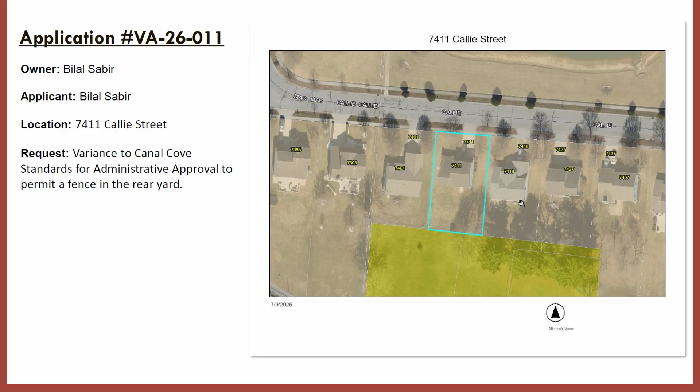The first item on tonight's agenda is VA 26011. The address of the subject property is 7411 Callie Street. The request this evening is a variance from the Canal Cove standards for administrative approval to permit a fence to be located within the rear yard. The applicant is requesting a fence in the location outlined with the red box within the rear yard of the parcel.

The development for Canal Cove, when it was basically created by Dominion Homes at its original conception, had a list of deed restrictions and other HOA restrictions that were also part of a document to be enforced by the City of Canal Winchester in a joint effort. As part of that list, fences are prohibited within the rear yards of this development. Otherwise, if you have a swimming pool where zoning code requires a fence, that fence would be a maximum of 48 inches in height.

So that happened back in 1995, continued through 2003, again with Dominion Homes. And then in 2015, when Westport Homes came through and developed the rest of the subdivision out, they reaffirmed those conditions for administrative approval. I have all 3 of those timelines located for you in the staff report.

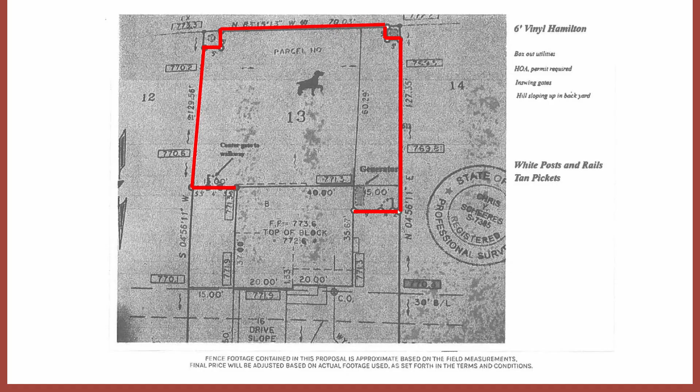When looking at the applicant's submittal here, they have requested relief from this standard due to a support letter from their VA physician stating that due to various medical conditions and PTSD which the applicant suffers, it requires the installation of a fence to secure the full enjoyment of his home and his property. This document was served under the Fair Housing Act and Americans with Disabilities Act, which both require reasonable efforts on behalf of the city. The applicant here put together this letter going over their request for the fence, as well as a copy of the VA prescription for the fence.

When looking at the criteria for approval itself, for special circumstances and conditions, the applicant has provided a medical recommendation that specifies his needs for his treatment. For a literal interpretation of the zoning code, the applicant would be deprived of his rights to use and enjoy his property based on his medical condition and his doctor's recommendation. Special conditions and circumstances, in this case, result from medical diagnosis and recommendation from a VA physician.

Granting this variance grants a privilege, but not an undue privilege because of the medical diagnosis. Staff recommends that for this fence to not adversely affect public health, safety, convenience, comfort, prosperity, and general welfare, the fence approval shall expire upon transfer of the property from the current owner/applicant and be removed from the premises upon transfer.

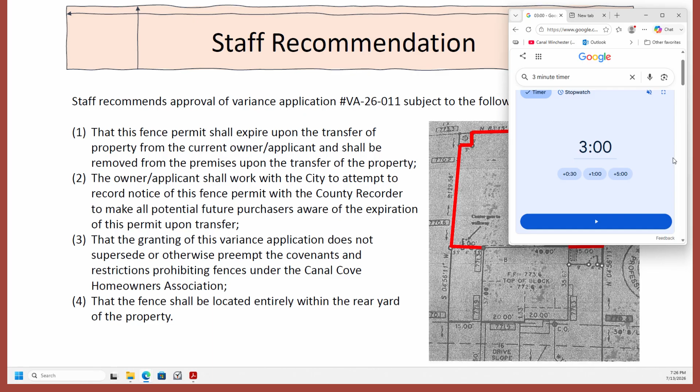No, I mean, I take those points. I certainly understand them if I was in the neighborhood or on the HOA. From our perspective, we have to at least make a reasonable effort to accommodate a federally mandated accommodation. And we think, with the conditions here — I also take the point on opening a Pandora's box.

My only counter to that would be — and you never know — but he does have a VA-approved letter with a recommendation of what he needs for his treatment and his care. So we tried to style the conditions such that this fence goes away when Mr. Sabir no longer lives in the home. That's actually not your condition that's on here, though.

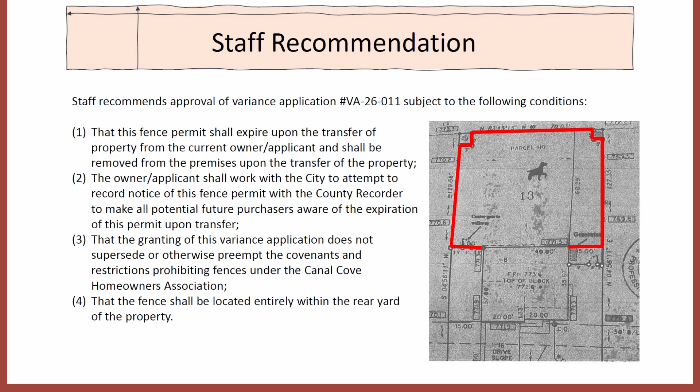The next application on tonight's agenda is variance application VA 26-012. The address of the property is 9270 Bowen Road. The applicant is requesting approval for a sign variance, chapter 1189.07A5, to allow a wall sign to be mounted less than 8 feet from grade. The subject property is recently developed, occupied by Oxford Automotive, an automotive repair facility, and the former Reichert Vanland site at the corner of US 33 and Bowen Road.

This property was recently rezoned to limited manufacturing based off an adjacent tenant on the same parcel, working with the owner earlier this year. The applicant is requesting approval to install some wall signs on the front of the building.

There are 2 variances for tonight's discussion. The first is for a wall sign that is less than 8 feet from grade, which is a requirement from chapter 1189.07A5 of the zoning code, stating no part of any wall sign shall be less than 8 feet above the sidewalk or ground level.

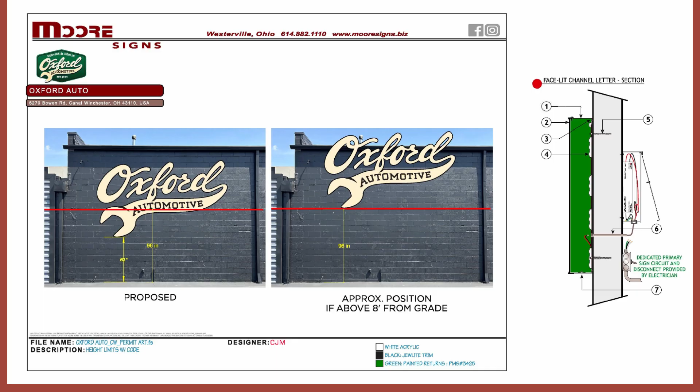The overhead displayed earlier shows previous parking from the RV dealership that used to be there. I don't believe that parking will be in use either. All pedestrian traffic for this location will be entering through the front of the building, which is to the northwest, and no pedestrian traffic would have the need to go beyond the sign for any reason, as the rear of the property is devoted just to the mechanics that work there.

In regards to the design of the sign, the wrench and automotive portion, as you can see, is nearly 50% of the overall graphic. This is branding that is consistent with the other locations across the city, Central Ohio, and it is important to add context to the word Oxford by utilizing the word automotive, and the wrench is very much important to add context to their building.

We'll get into this in the other variants as well, but one of the important aspects specific to this location we found is the adjacent property to the southeast is being utilized by a utility truck, bucket truck company, and the concern of the owner is that this may not come across as an everyday car mechanic, rather it might look like a utility truck mechanic, and they want to make sure they're very adamant about maintaining their brand for this particular sign and for the other variants as well.

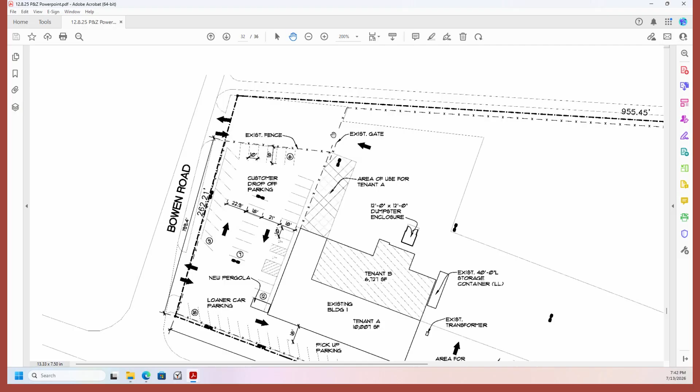This is the area in question for the sign placement to be below 8 feet in height from the base. And then again, the site plan, this is how the parking lot was restriped for the business. There is an 18-foot drive aisle, a one-way drive aisle between the building. The chain link fence is actually back this way a little further, with angled parking along that entire chain link fence side. So that's what created some of the concerns for the height and the placement.

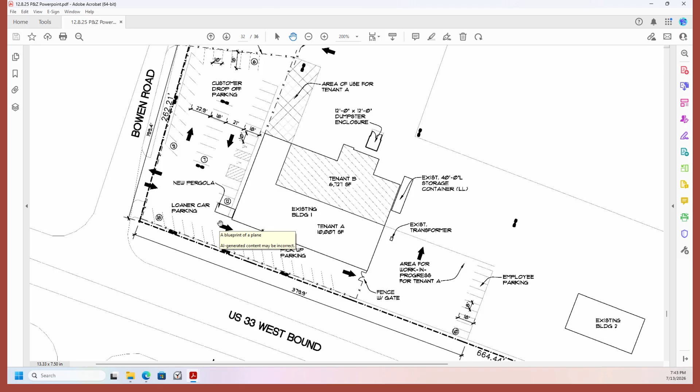And this is a technicality, if you don't know that's okay, but what percentage of the sign is below the grade as proposed? I think the other Mr. Moore could probably answer that better, but it appears to be from my end about a third. The very bottom of that wrench is roughly, is that 62 inches off? 5 feet. That's what that is, okay, I can't read it.

Any other questions for the applicant? Yeah, so assuming that is 100% scale, if you dropped it to 90% scale or 80% scale, wouldn't it fit? We tried reducing the size to get it fully above the 8 feet, and when you view it from the perspective of Route 33, it becomes ineffective, and more so it becomes a hazard because people are trying to read something they can't read as they're driving down 33.

I'm in the business of signs. Bigger is always going to be better, but there is real reason for having larger and easier to read signage when it comes to highways such as Route 33.

I guess to ask the next question, the graphic here shows it's dropped down a bit. If you were to push it clear up to its maximum height, what's the leftover size? It's about 6 inches. So if we put the top of the D, which seems to be the highest point of that logo, and butted it up against the gutter, we may get to where only the bottom part of the wrench would be below that line.

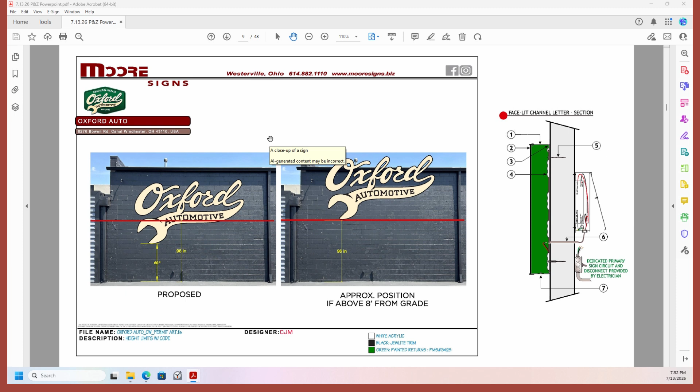Do we have a motion? Mr. Chair, I'd like to make a motion that we approve VA-26-012, with no additional conditions. I'll second that.

All right, so motion made by Mr. Deeds, second by the chair. Any further discussion on this one? All right, roll call. Mr. Donahue? No. Ms. Gooden? No. Mr. Deeds? No. Mr. Cosgrove? No. All right, so VA 26012 is not approved.

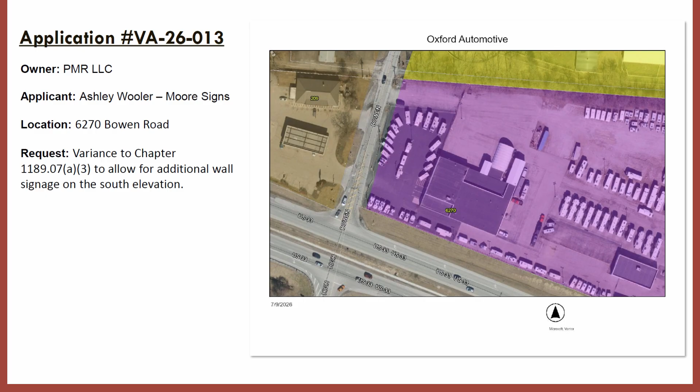The next application, VA 26013, same address, 6270 Bowen Road. This variance request is from Chapter 1189.07A3 to allow for additional wall signage on the south elevation. The applicant has proposed two signage locations on the south elevation. The two signs are shown on the graphic on the screen. On the left-hand side, the applicant is proposing a sign at 47.5 square feet that states 'We Fix Cars.'

I think the applicant explained it clearly in the last application. They want to differentiate themselves from their neighbor on this adjoining parcel, that they are not working on their equipment; they're doing their own differentiating services. On the right-hand side, as discussed in the last application, they want to have a second sign that is a branding identification for the name of the business.

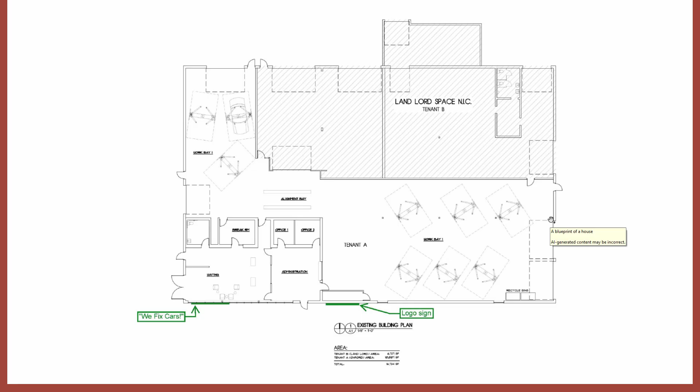The applicant has noted in their application that this elevation is approximately 160 linear feet. The zoning code would permit signage on that elevation of 160 square feet. The applicant is requesting an additional 22 square feet beyond that. Again, from staff's review, the makeup of that additional 22 square feet doesn't make an impact for it being a name of the business, or what services are offered. However, this is how the applicant has presented the information this evening.

When looking at the criteria for variance approval, staff notes that there are special circumstances and conditions not applicable to all lands or structures in the same zoning district. The applicant has provided information showing that the sign configuration is appropriate for the building scale, the US 33 traffic, the parking located in front of it, the fencing, and other elements that make this additional signage warranted. When looking at the literal interpretation of the zoning code, it would not deprive applicants of rights commonly enjoyed by other properties. Again, this parcel is unique—it was recently rezoned to limited manufacturing, and has a commercial auto repair business as the primary user on the property.

The user on the back end of the building is kind of secondary to this use. They don't have any actual on-site employment. They have vehicles coming and going, but no commercial traffic like this primary tenant has. Also speaking to New River Electric in the back, they don't want any signage, they don't have any need for signage. While that may change with any future tenant space for that rear part of the property, it does make an impact for tonight's discussion.

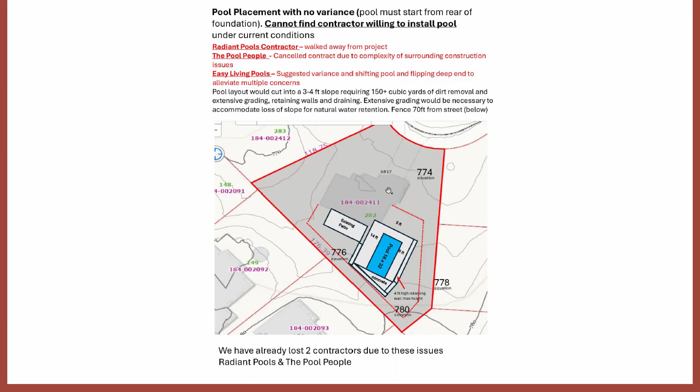Looking at this graphic here, comparing what was code compliant to what the pool company has provided as a solution - less than 50% of the pool is actually located beyond this line, in this side yard area of the property. Looking at a literal interpretation of the zoning code, it would require the applicant to reduce the size of the pool nearly in half to meet setback requirements, while considering what the minimum size of a pool should be to enjoy your property, or looking at other conditions.

This lot is also very irregularly shaped. It's in a cul-de-sac that is also a very short cul-de-sac. Looking at some of these conditions in total, this graphic here shows it really well.

None of their neighbors to the left of the house, if you're facing it, are on Murdock Court - they all have Murdock Lane addresses. So both neighbors immediately to the left of the house, all three neighbors, have rear yards only that face this parcel. Unlike, say, this neighbor here, which would have two neighbors that have side yards facing their yard.

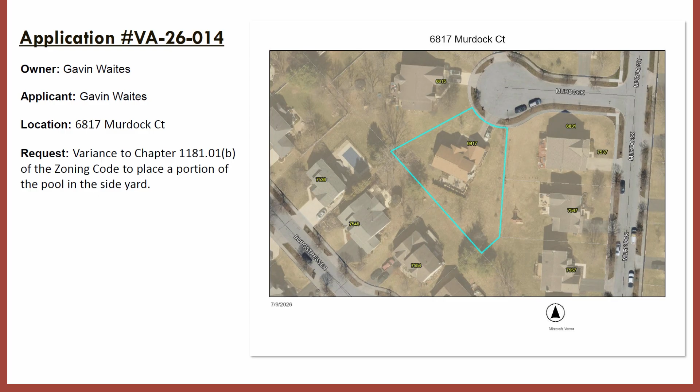So from a context perspective, if this wasn't a cul-de-sac and there was another parallel street here, you'd have two backyards facing each other, so it's not as much direct conflict with an adjacent neighbor as it would be if it was one lot away. That laid into staff's consideration for the recommendation.

When looking at these special conditions and circumstances, again, they do not result from the actions of the applicant. Site grades in this section of Ashbrook Village generally follow natural topography. This is a very unique subdivision with a lot of grade change throughout it - something I think a lot of the neighbors in that community pride and enjoy. So modifying the existing grade on a lot-by-lot basis becomes a little abnormal rather than working with the existing grades.

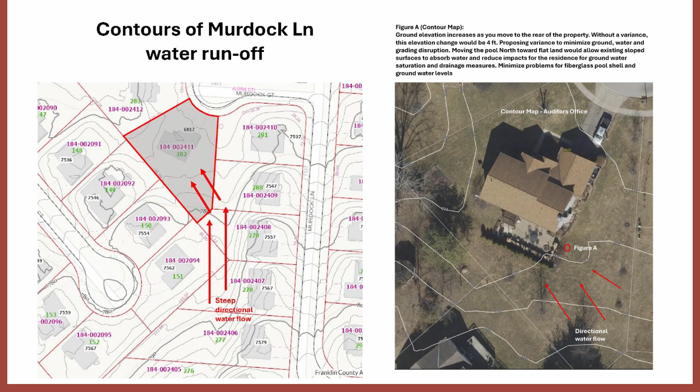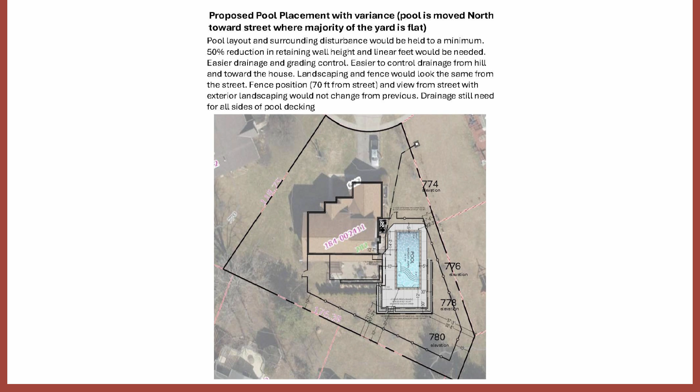The applicant has noted in their proposal that their installation still requires a small retaining wall around three sides of the pool. In talking with the applicant, I don't think I put it in my PowerPoint deck, but they have a graphic in their presentation showing they're proposing to screen the majority of this pool area with additional landscaping to help soften the impacts of its placement. I think the applicant was looking to do that regardless of where it went, so that's just part of the deck I didn't get up on the screen for you.

Staff is recommending that VA 26014 be approved with the condition that the applicant provides a copy of the HOA approval letter during the submittal of the pool permit process.

Some communities like Ashbrook and Villages of Westchester have items that are not administratively regulated but have HOA approval processes. Staff tries to work with those HOAs—in Ashbrook specifically, they have certain types of fencing that they allow and don't allow. We've found administratively over the years that a homeowner gets approval from staff, doesn't go to the HOA, and then the HOA is left trying to chase it. So we try to help Onyx Realty out on that aspect because they've been sharing information with us, which is helpful for our internal processes. It's kind of a mutual agreement for helping that neighborhood out.

Thank you. I know we've granted variances similar to this for lot size coverage, especially in Westchester, over the last 12 years I've been doing this. I don't know that we've ever seen one in the side yard, but for this particular property and layout, I think it's the most reasonable.

My question is, during the pool permitting process with the city, do we have somebody in the technical review or permitting process who will go out and ensure that the slope and grade of the natural drainage down that hillside is not impacted by the construction or placement of the pool? Meaning, in a large storm, there's not a natural impact based on this structure going there. Really good question.

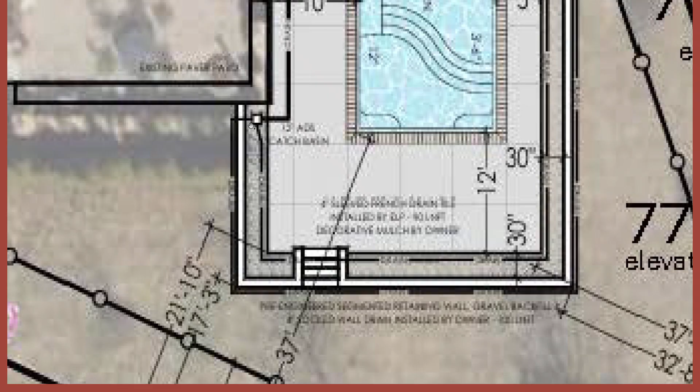Yeah, I think there's like two French drains. I don't have the zoomed in version of this, but they're showing a retaining wall—this bold outline, kind of white line. And I believe all of this in here, based on how they had the hatching done, was to be some kind of graveled area around the perimeter of the pool. This retaining wall itself, just for a frame of reference, if there was no pool, we would have no permit process for it if it met the RCO standards.

So from a stormwater perspective, let me go back here. This site flows from this direction to this direction here, based on grades. There is a stormwater catch basin along the rear of these lots—I believe this property has a catch basin maybe midpoint here and midpoint here to capture stormwater flow. So from an impact standpoint, just from the grades, I think it would impact this property owner and not off-site parcels.

Okay. I just think it's worth noting in the permitting process. That's all.

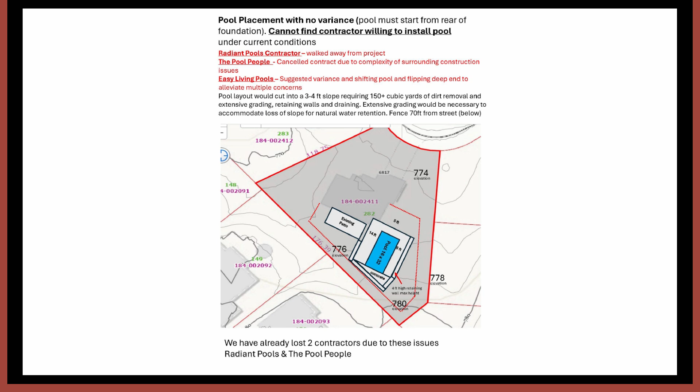The other question I had—are there any restrictions? I do appreciate that they're going to work with the HOA and put a fence around the pool and the property. I just can't remember in the residential code if we have a limit on the fence to, I think it's that front line—I always forget the technical term, the build-to line—from the street and the right of way, in terms of where a fence can be.

So from the city's code standpoint, to make it blanket and then piecemeal it: on the property, you can have a fence anywhere. Anywhere from the front of your house towards the street is limited to 3 feet in height and has to be a decorative picket or open style. Anything from basically this line of the garage here backwards can be a maximum of 6 feet tall.

In terms of the HOA approval process, I don't know if they have any differentiators for front yard versus side yard. Again, I don't look at that aspect of it. The only thing I know from the HOA process is they require a maximum of a 42-inch tall fence unless you have a pool, and then it's bumped up to 48 inches in height.

Up until 3 or 4 years ago, it was wood fences only, and I think the HOA has switched it to now allow vinyl fences. Finding a vinyl fence at 42 inches tall is next to impossible, so I don't know if that weighs into their decision to do that or not.

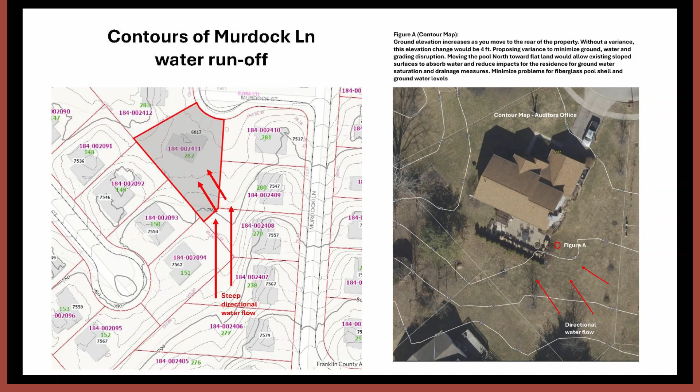So it complicates issues and risk with putting in a pool structurally. So with all these issues with contractors, we finally found one that said, if we're going to do this, this is our suggestion, which is the Easy Living Pools graphic. Essentially, they're wanting to shift it a little over 14 feet into the side yard.

To answer some of your other questions, the outline is a fence which is 8 to 10 feet off the property line, so that will be well off the property line. I don't have the graphic to show, but I'm putting in green giants and arborvitaes around the fence line, so in a few years it's going to be totally private. Even the front, I have beds. With the fence being the way it is, even with or without a variance, where the pool would be, it's going to look the same from the outside.

So the fence is a 4-foot vinyl. It's a Hanover style, so the vertical slats are close together. You're not going to be able to see through unless you're right up to the fence.

And then with all the growth that will be planted between the fence and the property line, they're not going to see that anyway. So from the street, just to give you some distance, it's 70 feet as planned from the fence to the street. And I do have approval from the HOA.

I've already sent the design. They are good with a 4-foot white vinyl fence. I sent them the style, and they're good with the design going around from the side yard, wrapping around to the back side of the house.

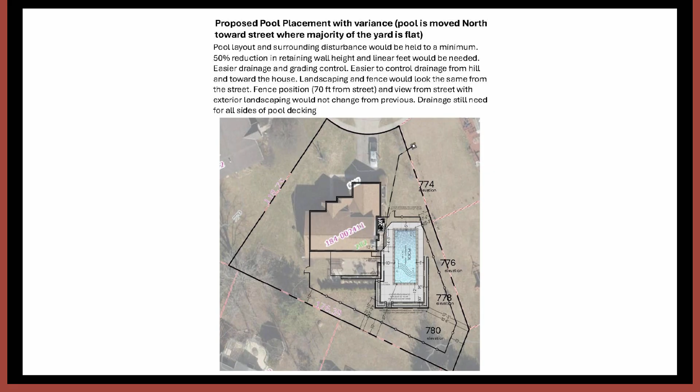All right, motion made by Ms. Gooden, second by Mr. Paulsgrove. Roll call. Mr. Donahue? Yes. Ms. Gooden? Yes. Mr. Deeds, yes, and Mr. Paulsgrove? Yes.

All right, Mr. Chair, I'll make a motion to approve variance VA-26-014. Second. All right, so...

So just as stated, they want to proceed with the HOA approval letter and the permitting process. Okay? Yes. All right, so that was made by Mr. Deeds, second by Mr. Paulsgrove.

Any further discussion? All right, roll call. Mr. Donahue? Yes. Ms. Gooden? Yes. Mr. Deeds, yes, and Mr. Paulsgrove? Yes. All right, so VA 26014 has been approved. Good luck.

The next application on tonight's agenda is VA 26015. The address of the subject property is 7188 Charleton Court. This request is a variance from chapter 80.27.04(7) of the 1990 zoning code to reduce rear yard setbacks.

Again, just as a reminder, frame of reference, Villages of Westchester was planned in the 90s. All the zoning code standards are related to the 90s. This section, the text has not changed from the 90s to today, but just referencing the appropriate title from the 90s was used in this application.

The applicant is requesting approval to install a covered rear porch in the rear yard over the existing concrete patio.

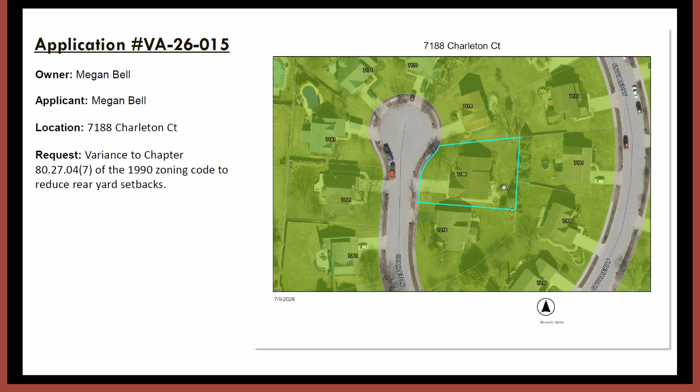So the rear yard setback in all of Westchester is 30 feet. Correct. Can you go back to where you have the measurements? I just need clarification—what does the 31.6 illustrate? So if you see this bump out on the rear of the house here, that is the distance from that line of the bump out to the property line. Looking now at an aerial here, that may be a bump out for a chimney maybe, or a bay window—it doesn't look really substantial for size. So are we saying right now that it already doesn't meet the rear yard setback because of that? No, it does. The house at the closest point is 31 and a half feet away. Okay, 30 feet is the minimum.

And what would it be with the proposed accessory or addition? The applicant's plans show that it'd be 24.3 feet away. My measurements, just based off of 37.4 minus 14, puts it at 23.4.

Any other questions for staff? If it's a different structure, a pergola, any of those types, does that require a variance as well? Or is it just a permanent structure?

So basically, if it's something that is attached to the principal dwelling, like an attached deck, I think our building official may even require any decks that close to be considered attached. If it was a pergola, or an open-ended pavilion that didn't have walls, because it's physically attached to this dwelling, it's part of the principal dwelling.

It would make it smaller, basically where this brick is - do you want to see a picture of it? Sure, I have a couple copies. That's right, it's on the next page. This is what it looks like currently, and this is what we want to do.

But where it is now, where the brick is, we're basically just coming out from the brick. I'm assuming the mulch beds and brick are probably already in the setback, because there's brick, then the prior owners added some type of stone and mulch. So we're basically just covering that area. If we made it smaller, it's going to look weird on the back of our house because it comes directly off the kitchen - it would look mismatched compared to the other side of the house.

Any other questions or comments for the applicant?

There's a note I should have mentioned - we did talk to all of our neighbors. Everybody's fine, but one of our neighbors wrote a note. He couldn't be here tonight, but he wrote a note, so I stuck that in there.

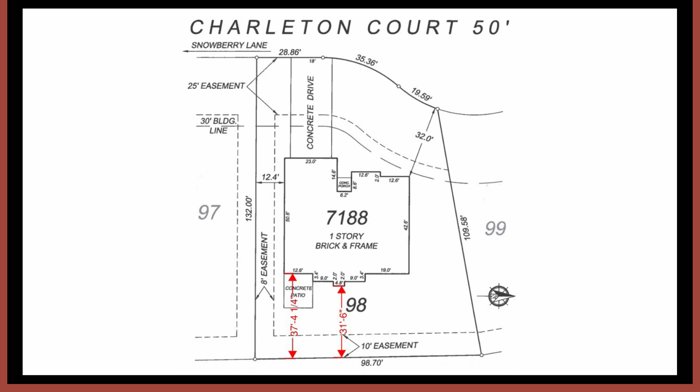So my comment would be, I think there's a couple things - it's a separate conversation from lot coverage on a pool or concrete patio or those types of things where it gets over 30%, and some of the things we've seen in the past. It's also a structure because it's connected to the current dwelling, and I think we're about 7 feet-ish over, thus the variance request.

Personally, I think it's a nice improvement to the property, and it's not encroaching on any easements or anything like that, but I do respect what the deed restrictions are and kind of what the setbacks are as well.

A lot of things in the city of Canal Winchester are complaint driven, so it's hard - staff can't go out and police if there are other setback encroachments within Westchester or anywhere else that might have these types of restrictions. And we did approve one after the fact within the last 3 or 4 years, but that's the only one we've approved in Westchester.

That was a situation where he did all the work and then asked for our approval later. And so I appreciate following the process and doing it the right way. That's just my opinion on it. I have no further comments.

But that was not a rear setback issue, was it? I believe it was - it encroached in the 30-foot? No. So that particular application I was discussing, they came before you because they were further exceeding lot coverage. Yes, that's what I thought. But part of the prior projects that took place over the past decade also encroached setbacks, though that wasn't the specifics of what was being discussed that evening. That was the only mention I could find of it in our database that goes back 25 years.

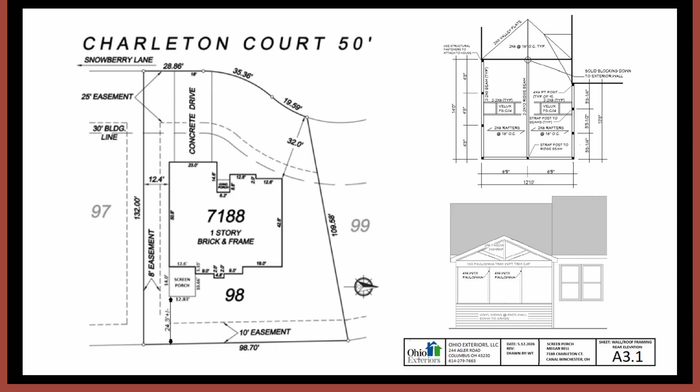The next application on tonight's agenda is conditional use 26002. The address of the property is 229 Winchester Cemetery Road. The request this evening is a conditional use approval from Chapter 1167.03 subsection G to permit a commercial kennel on the subject property for a cat rescue.

I'm going to try to pick up speed here. We've been here for an hour and 42, so Ellen, if I missed something, feel free to correct me. The address of the subject property is this parcel where 229 Winchester Cemetery Road is located. The request for the conditional use limits I've outlined in blue just for clarity, just to show that it's not the full property, full building. It's only a portion of the tenancy of the building itself.

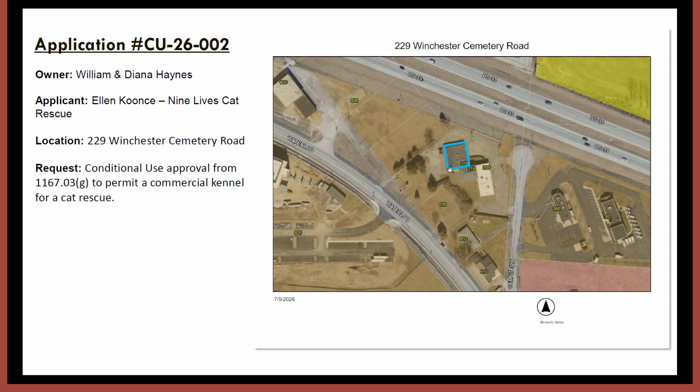It is formerly the Winchester Veterinary Clinic. They haven't operated in that facility since the 2019, 2020 timeframe, when they moved to Thrush Drive.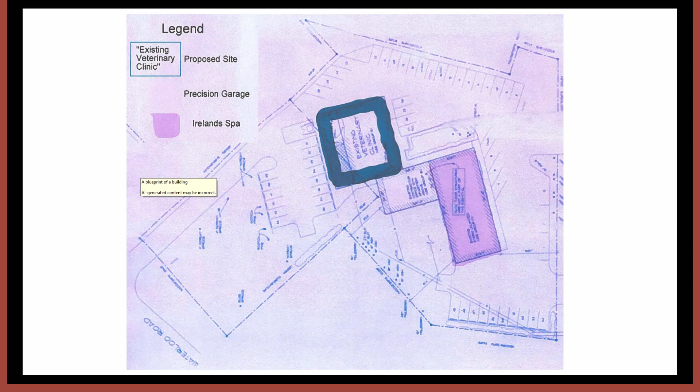The applicant, and this is where I'm going to try to be very brief, has plans on operating a boutique-style nonprofit thrift store that also has an indoor cat adoption and care area associated with the organization's rescue program. The applicant notes that the space will be clearly separated on the interior of the building for the 2 components. Based off the floor plan provided, I apologize it's kind of washed out on the screen, roughly 50% of the building is for the kenneling, the remainder is the retail component.

The retail component is the portion of this application we're not discussing tonight because it's a permitted use. It doesn't have any bearing on the conditional use. However, I've put as much information in my staff report to show the relationship between the two. So if you see there's a lot more in the applicant's submittal that's not in my staff report, that was done on purpose to focus your attention on the kenneling component tonight.

The applicant does list in their application the types of services offered and rooms associated for the cat rescue. They have a quarantine area, an intake area, internal temporary housing, separated litter areas, adoption area, and an office. The applicant's details show that a maximum of 12 cats will be housed in the free roaming adoption area, and within the intake quarantine zone, they will have capacity for an additional 25 cats.

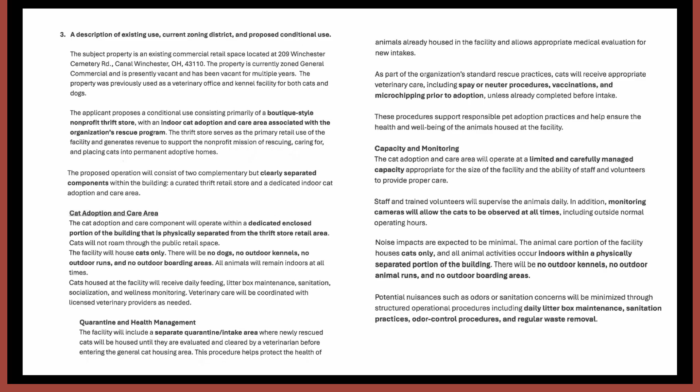The site used to be a veterinary clinic, having animals in the spaces in the building's past history. So promoting that type of service in the future is compatible in that nature. And the proposed interior occupancy of the building would not result in the destruction, loss, or damage of any natural, historic, or scenic features.

So staff is recommending that CU 26002 be approved as presented.

Questions for staff?

I guess I'm curious, why does this require a variance? So it's a conditional use request, not a variance for relief. A conditional use is a use in our zoning districts that is noted to require an additional level of review based off the contents of the application. Commercial kenneling is a conditional use in the general commercial zoning district, basically to review what type of kenneling, what the limits of it are, self-imposed limits from the applicant, location of the property, impacts to surrounding property owners, utilities, services, etc. So in this case, because they are kenneling cats as a business, and our code does not differentiate between temporary housing, like you're on vacation, or for sale or adoption animals, this was categorized under the kenneling component.

So this could be a question for the applicant, but I'll ask you first. Do we know how interdependent the conditional use, so the cat rescue and the thrifting business, are on each other? Is there a retail business no matter what, and then this is secondary, or are they presenting it together? That I think is a good question for the applicant, maybe to answer in terms of the relationship between the two. But from my understanding, one supports the other.

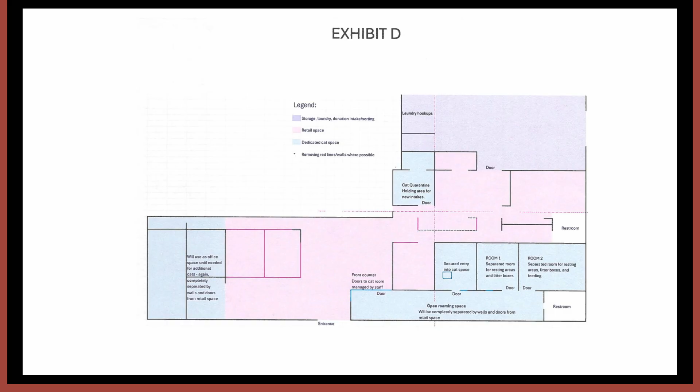All right, Mr. Chair, we'll continue on - let's make a motion to approve conditional use CU-26-002. Second. Motion made by Mr. Deeds, second by Ms. Gooden. Any further discussion? Roll call: Mr. Donahue? Yes. Ms. Gooden? Yes. Mr. Deeds? Yes. Mr. Paulsgrove? Yes. All right, so CU 26-002 is approved.

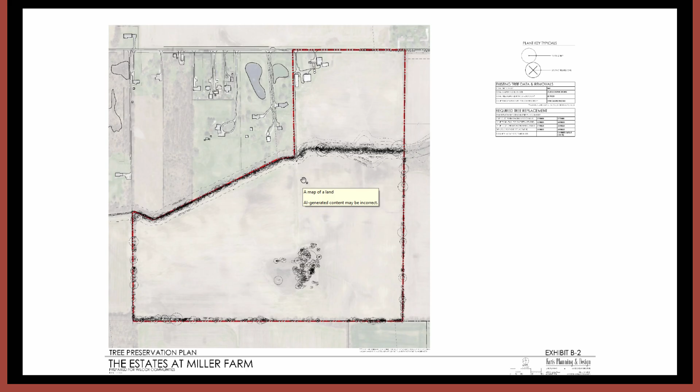When looking at the contents of the subject property, this is kind of the existing site condition. It shows there's some mature tree line fencing that's throughout the parcel. There is a wet area centered around the parcel, with some mature tree growth. But this really just serves as an existing condition graphic that shows, with the farmhouse, 99% of this property has been farmed for a long time.

When looking at the development plan itself, the applicant is proposing 271 lots. The site plan is broken down to connect to the development which has been approved to the east. This is the single-family development phase, this kind of L shape from the neighboring community that is going to be under construction. This road was designed to have a stub street to the north carrying through to this section of property, a stub street to the section south of the ditch carrying through to this parcel, and this property itself connects both north and south halves of Lisle Ditch together.

The property itself is proposing future stubs to the south to adjoining parcels. We require in our planning efforts to have stub streets connect to adjacent available ground when available, to promote good connectivity and good traffic patterns. I would say that historically we have not been so good about connecting on the other end of these connection stubs, but there's always the chance that this next project will make it. We have some stubs in Ashbrook Village that have yet to be connected to other parcels, other farm ground. We have some failed stub connections in Winchester that never made it, things of that nature. So best practice is always to provide them for future connectivity.

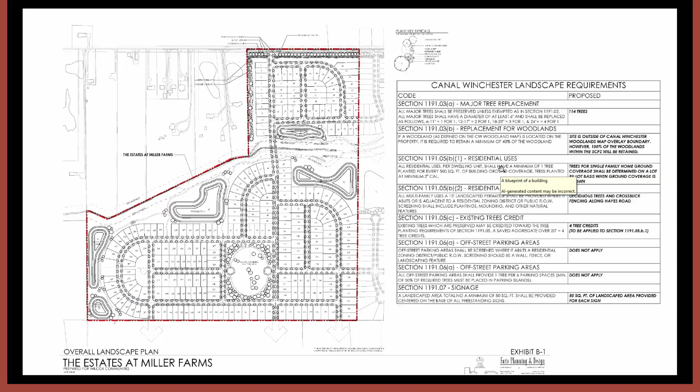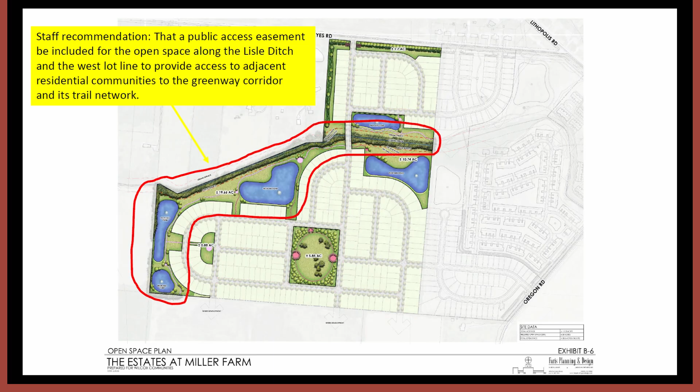The development pattern has examples for public amenities that will be provided throughout the site. Again, these are just examples, they'll be nailed down more during a final development plan, but there are commitments for fencing, public archways or gateways, pavilions, benches, and things to be utilized along the trail system, helping brand the neighborhood similar to the phases for the project to the east.

As part of that, the applicant is proposing to continue the hedge setback from Hayes Road to help buffer this property from adjoining residents, with mounding, landscaping, and a decorative crossbuck fence in black that will match the other approved phases, shown as this line in red at the top of the screen.

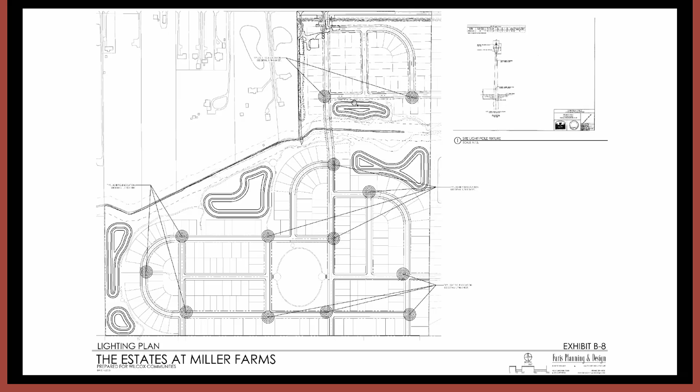For utilities, those will be pulled from the east with the development of Miller Farms. As those phases get constructed, they will extend west to this property.

Just to give some context, it's not really called out in this application, but I'm sure Andrew can speak to it from the applicant side this evening. Rockford Homes is developing sub-area A. Planning and Zoning Commission approved their final development plan. In talking with both the applicant and Rockford, they would like to immediately roll from this section of A to this new project, to have their development focused on the north side of Lisle Ditch. So it's not going to go north to south, but east to west. This phase is likely to be kicked off first.

As part of that, the infrastructure for this phase will be stubbed here to immediately serve this. Getting down this far requires more coordination with sub-area B.

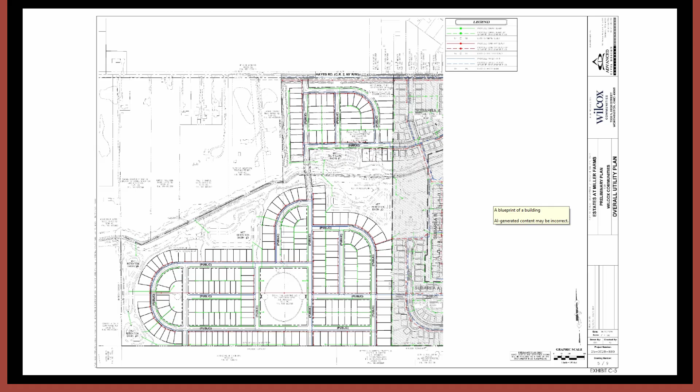With the utility service area and the density of over 400, 600, 700 some lots off of the same utility service area, our city administrator and public service director have concerns that the water line does not loop from its termination for this project at Oregon to this connection point along this major road that feeds into the rest of the development. So a condition of approval will be that the water line loop be installed. It's going to be an off-site improvement as part of this project, same developer, but to facilitate additional water service capacity in case of an emergency, so we don't have to shut down 700 some houses at once.

As part of our efforts, this water line is being pulled all from this one point for this development. What we are going to be doing is taking that water line, extending it down Lithopolis Road, running it up Gender Road, and taking it to Ashbrook Road on Washington Street, to help loop the system and provide some redundancy to protect the neighborhood.

In terms of the deviations throughout the project, the applicant has requested a number of deviations similar to Miller Farms to the east, in terms of setbacks for the garage, encroachments for the porch. This development phase is proposing porches can be closer to the front yard setback line, and screened-in porches and decks can be closer to the rear setback line, allowing for more stretch in this direction. It's also increasing lot coverage to 60%.

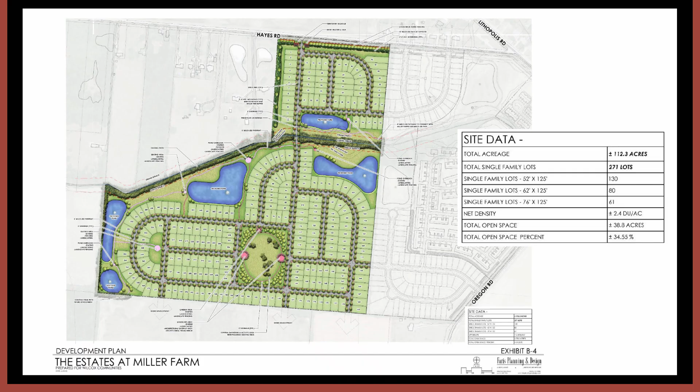The applicant has proposed many deviations from the underlying zoning district standards to create more lot density, allowing for larger homes and smaller lots. Staff recommends that these impacts be closely considered for their effects on public health, safety, community comfort, prosperity, and general welfare. Again, as I noted, the applicant has noted the trade is for more development on the lot, for more publicly open, common open space throughout the project. And the proposed residential growth is noted in the 2023 community plan. The city has anticipated future residential growth in this area as planned for services, and the traffic impacts and potential required roadway improvements warrant additional consideration and study, which is currently being done.

So staff is recommending that ZM25002 be recommended for city council approval. That's for the zoning map amendment itself to a plan district. For the contents of the plan, PDP 25003, the plans presented are consistent with the purpose, intent, and standards of the zoning code.

The applicant has addressed all their deviations and how in their opinion those deviations result in better quality development. Again, Planning and Zoning Commission should closely evaluate those deviations and their potential impacts, and whether the benefit that is being presented outweighs the deviation itself.

The PDP is in conformity with some aspects of the 2023 community plan. Rural preserve settlement was noted in that plan, as it promoted smaller building footprints, pedestrian connectivity, rural residential land uses, and open space. The proposal presented preserves technically less open space than Miller Farms to the east, but when looking at Miller Farms...

I made a really cool graphic I didn't put in here. To the east, all the open space in between the buildings within the multifamily areas counts as open space, so those green areas technically add more percentage-wise. However, when you look at just this chunk of green here and this chunk of green here, that's the only open space in sub-area A for the residential parcel to the east. It's just a difference in what type of units are being provided and how that open space is calculated.

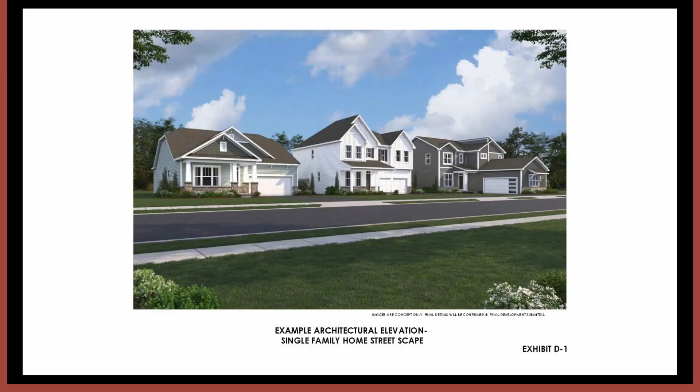And then finally, that the water line planned with Miller Farms East, the parcel to the east, along Lithopolis Road, currently proposed to terminate at Oregon Road, be extended south along Oregon Road to loop with the phase of Miller Farms south of Lisle Ditch. It's very wordy, but this graphic here just shows looping that water connection.

And this, again, would be kind of a pseudo off-site improvement, but same developer, to loop that system for the sake of redundancy.

I tried to be quick. Yeah, probably wasn't quick enough, but, any questions, Matt? Great job. Questions for staff?

I think the main one is a 36-foot wide road encourages speeding, and that's usually the biggest complaint we have. So are we going to build traffic calming into it instead of trying to go back and retrofit it?

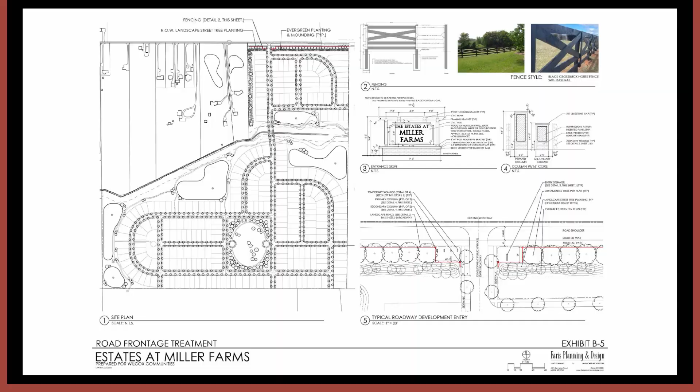That's a really good comment. When I was talking with the city administrator about this, we were taking a look at the orientation, and with a grain of salt, the lot configuration and stuff could shift or change. This is a preliminary plan, so nothing is tying the developer to exactly what you're seeing on the screen, but given the speed of how they did the last project, it's probably pretty close.

Given that, we were talking about how to do crosswalk bump-outs on intersections that make sense, to choke down the road in selective areas, and to look at doing maybe a mid-block crossing at this green space, throwing in a bump-out to choke down that long stretch.

So yes, we have talked internally about the traffic calming component. That would likely be something we could work with the applicant on during final development plan submittal to show some of those details, but if nothing else, it could be done during civil engineering review. Okay.

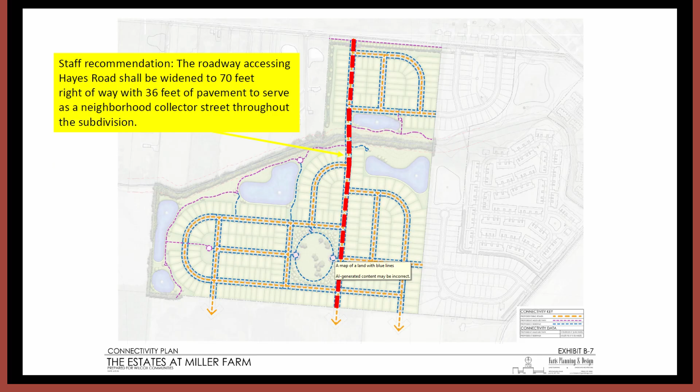Other questions for staff? Anything the applicant wishes to add that hasn't already been covered?

Andrew Bowser on behalf of Wilcox Communities, 7,000 North High Street. Thanks, Commission, appreciate coming back. We saw each other in January. Andrew kind of covered everything pretty astutely. Appreciate his rather in-depth review of pretty much everything. Most cities don't do that. Your staff is quite qualified. We really appreciate coming back. Very fond of Canal, always looking for additional growth and development.

We're also looking at parcels to the west and to the east and south of this as well. Therein lies some of the stub-offs that are there. The only thing that I would add, based on the same comment that Mr. Deeds had brought up, shifting it from 30 to 36 definitely gives us a little pause, just from the standpoint of what that street could potentially look like in the future.

So we have no issues with 1 through 3 on the conditions. We just ask that 4 and 5 continue to be discussed and wait till civil engineering review, to give us, staff, and the proper engineers more time to review, talk internally, and come to the correct decision that makes sense for the development, including the water line and the redundancy, to really finalize a plan.

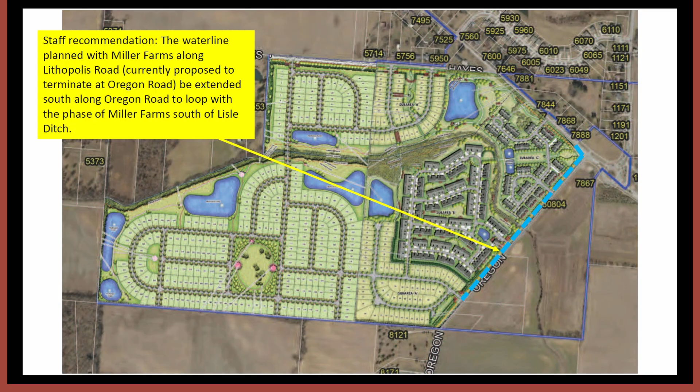Roll call: Mr. Donahue, yes. Ms. Gooden, yes. Mr. Deeds, yes. Mr. Cosgrove, yes. And so again, this would be a recommendation to City Council for approval with staff's recommendations at this time.

Mr. Chair, I'd like to make a motion to approve preliminary development plan PDP-25-003 with a recommendation to move to full council with the following conditions, and condition number 4 and 5 will continue to be worked out as we move through the process.

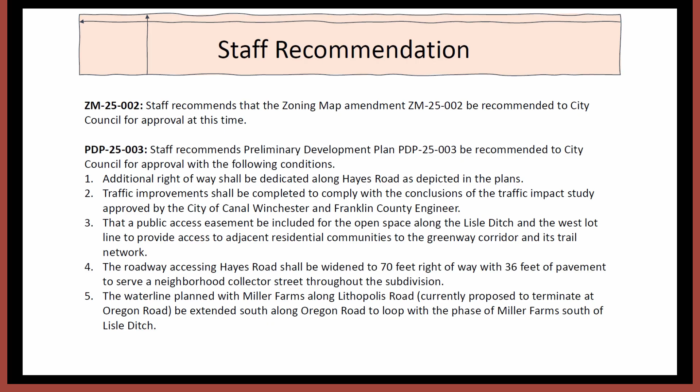And those are still conditions on your motion, correct, Mr. Deeds? Second. Motion made by Mr. Deeds, second by Ms. Gooden. Any further discussion? Roll call. Mr. Donahue? Yes. Ms. Gooden? Yes. Mr. Deeds, yes. Mr. Paulsgrove? Yes. So PDP 25003 and ZM 25002 have been recommended to City Council for approval.

I'm gonna try to keep all new business really quick. Don't ask me questions, just teasing. It's hard.

Joe Wildenthaler sent a resignation letter to myself, the mayor, and the city administrator. He is looking to step down from the Planning and Zoning Commission. The mayor is currently reviewing applications to fill that seat, and is likely to propose a nomination at next Monday's city council meeting to fill his term for the remainder of this year. That person can then continue and ask for a new appointment for another 4 years, so don't scare them off because they only have a few months, they can't commit for 4 years immediately.

For other old new business, staff is still reviewing zoning code updates. We're on draft 5 of the first quarter, the third draft of the middle half, and the first draft of the last quarter. We're hoping to have another steering committee meeting within the next 30 to 45 days to review the middle half.

You guys already had the review for the first quarter. You have not reviewed the middle half yet, you'll review that and make some comments and recommendations. The steering committee is not reviewing the last quarter, but I will send it to you and Deborah because it's the subdivision regs, which really affect the Planning and Zoning Commission and all the directors and staff more than the rest of the committee. So I'll send that to you once we get another draft.